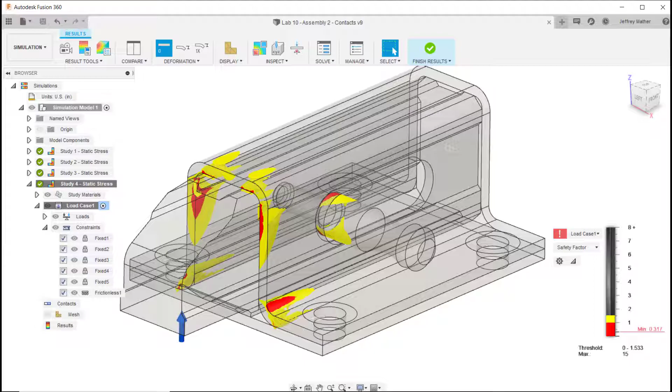After opening the step file in Inventor 2020, I grounded all of the components so that I don't accidentally move them. Then I want to measure a distance on one of the parts to make sure that the size makes sense. We see that it's 3.75 inches, which was our expected size, so we're okay on that.

We might go to Tools, Document Settings, and check the units. We see it's inch units, but when this was brought in as a step file, it sets our angle as radians. I'm going to change that to degrees.

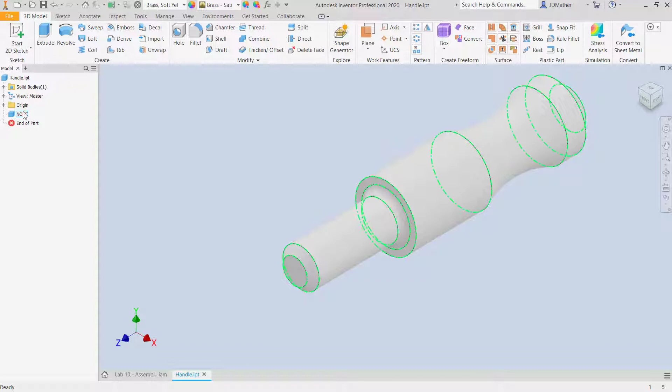I'm then going to open up each one of these parts individually. I'm going to open up the handle, and I'm not going to run any feature recognition on this, but I do want to run a quality check. I'll right click and select repair bodies, and select find any errors, select all, and I get a green check mark that everything is okay with that.

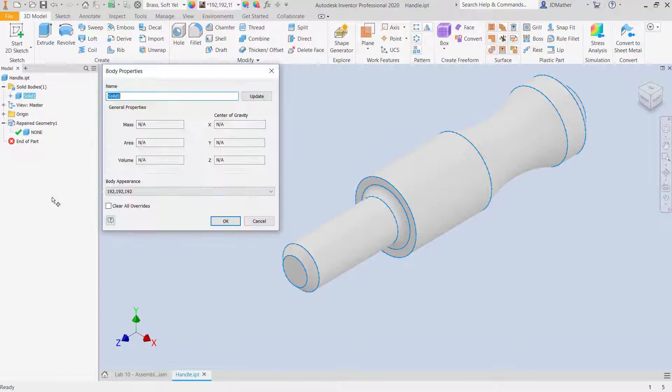Now I've already assigned the material brass to this. Notice the appearance is showing here as brass, but the part itself isn't showing as brass. Expand the solid bodies and right click on the solid body and go to properties and select clear all overrides, and it still didn't change, so let's right click again, and I'm going to set this as a brass appearance and select clear all overrides, and this time we have our color.

I'll save that and close it, and then I'm going to open up the base plate. I've already set the material to steel.

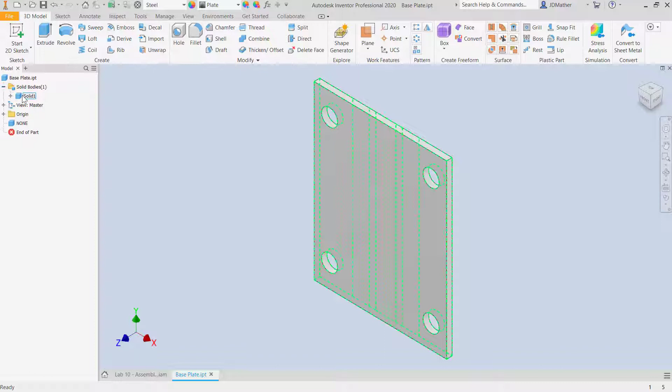I'm going to again right click and go to appearances or properties on that, and I'll select clear all overrides, and I'm going to select a steel polished color, and I'll right click and go to repair bodies, and I'll check it to find any errors. Green check mark, everything's okay.

I'll save that and go to the next part. I'll open up the housing, and let's go ahead - I've split this with the clamping faces where the fasteners will go, and I will run the repair bodies, find any errors, we get a green check mark, that's okay.

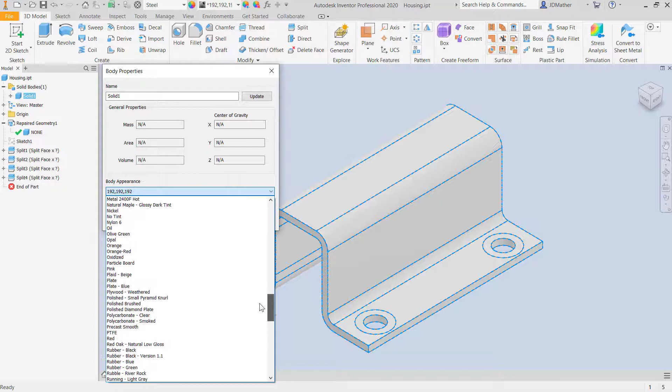I'll expand the solid bodies, right click, go to properties, clear overrides, and I'm going to set this as steel polished. Save that, close it, and I'll open up the latch bolt. I've set the material to malleable iron.

Let's check the part itself, select repair bodies, find any errors, everything checks out okay. I'll expand the solid bodies folder. I'll go to the properties, clear all overrides, and let's see if there's an iron cast appearance, and I'll save that, and I'll go back to the assembly.

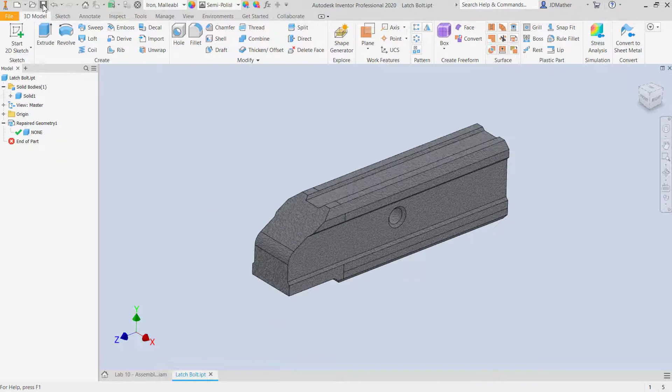Okay, so there is my assembly. I will save assembly, and then I'm going to go to environment stress analysis. I've already set this up and tested it out to run it a couple times.

In my first analysis, I didn't set the soft spring, so if I go to edit study properties, we see that I don't have it set to detect and eliminate rigid body modes.

I copied that study and changed a couple of other settings, and on this one I edit study properties, and I'm going to select detect and eliminate rigid body modes to add a soft spring. That will stabilize the model so this latch isn't moving.

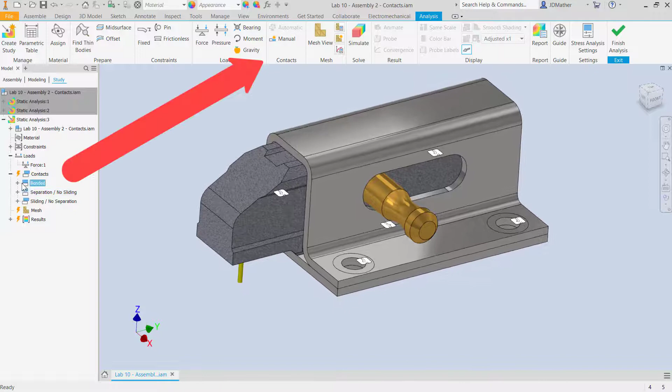I then on the loads I put the 1,000 pounds force pushing up on that face, and then for the contacts I changed the contact so that I have bonded on this side, bonded on this side, bonded between the handle and the latch, and then another bonded between the handle, the cylinder on the handle, and the hole in the latch. And then I have a separation no sliding on this side and a separation no sliding on this side, so as this pushes up this face can separate from the base plate.

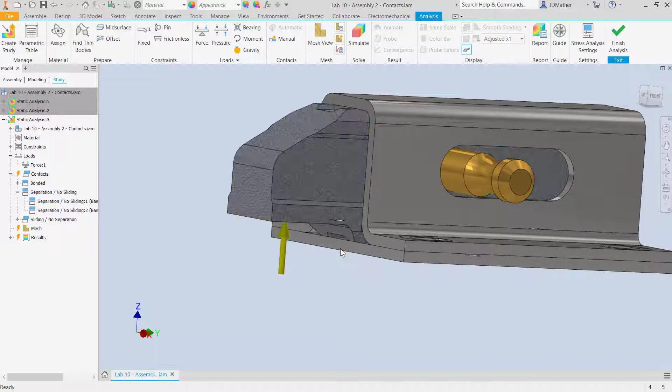And then I have sliding no separation on the side here, here, here, over on this side, and also up the top, the two faces up the top where that contacts it.

When we run the analysis, we get a message that the model has separated into two independent components. This is expected behavior as the latch and the handle are bonded into one component and the housing and base are bonded into the second component.

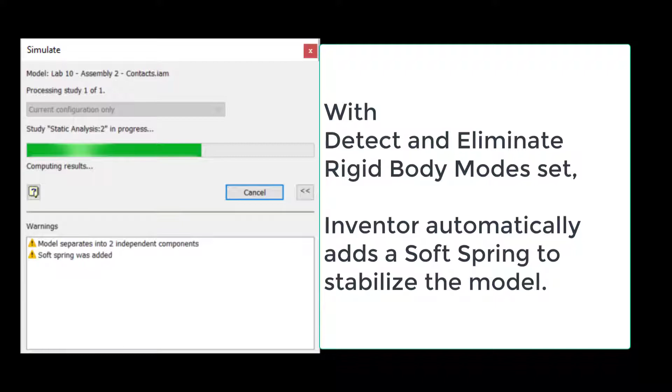With detect and eliminate rigid body modes set, Inventor automatically adds a soft spring to stabilize the model. If I go to the stress, I see that I have a high stress area right where this edge meets this edge, here and here. The rest of the area is not very high stress. For my displacement, I have a minimal amount of displacement, and for my safety factor now, I have a low safety factor where that high stress is.

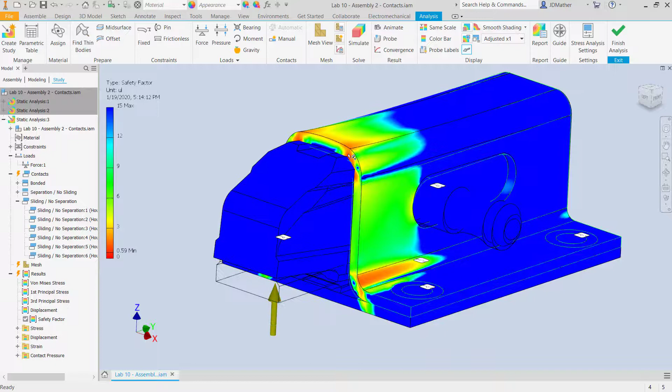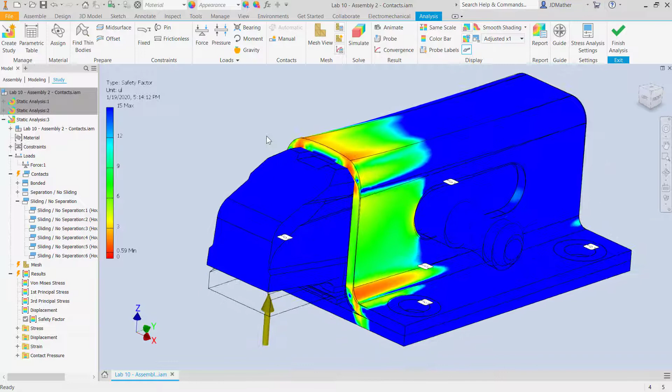So think that the stress is equal to force divided by area. The area where this edge is contacting that edge is close to zero, and so we end up with a singularity or a high stress area in that area that we can probably ignore, as we know that this edge is going to get rounded off as we use this assembly, but it really has no effect on the overall performance of the assembly.

I've brought in an imported STEP file. The first thing I'm going to do so that I don't accidentally move any of the components is I will fix them in location. I next want to check my units, so I'll go to the options and document properties. I'm going to set my standard to ANSI, and I want the units to be set to inches. And while I'm here, let's improve the image quality so that our circles look like circles.

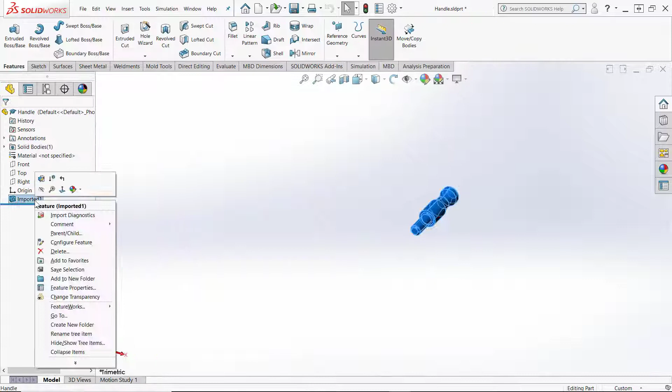I'll then measure one of the edges to make sure that it makes logical sense, and I see that that edge is 3.75 inches, so that's what I'm expecting. So always check your measurements and check your units to make sure that it makes sense. I'm then going to open up the handle, and I will right click and I'll run import diagnostics. I see that I have one issue. I'll attempt to heal that. I successfully healed it, and then we will set our material, and let's set this material as brass. I'll save the file and close that one.

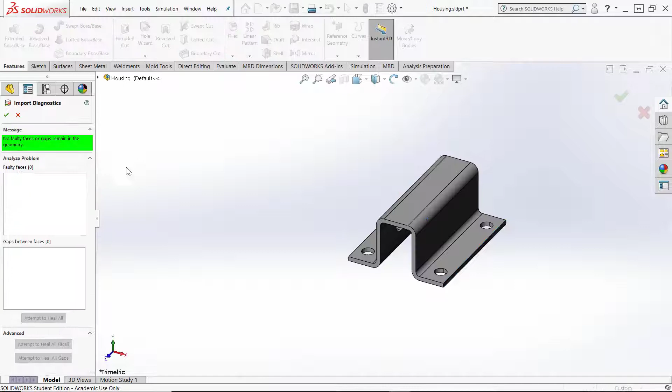I'll go to the next one, so I'll go to the housing. I'll open the housing. I'll run my import diagnostics, heal any errors, and let's set this material to 1060 alloy. I'll save the file and close it. I'll do the same thing for the base plate. Open that part, and we'll run our import diagnostics, and we will also set our material to 1060 alloy. And we'll do the latch. I'll run my import diagnostics, heal any errors, and let's set the material to malleable cast iron. Save that and close that.

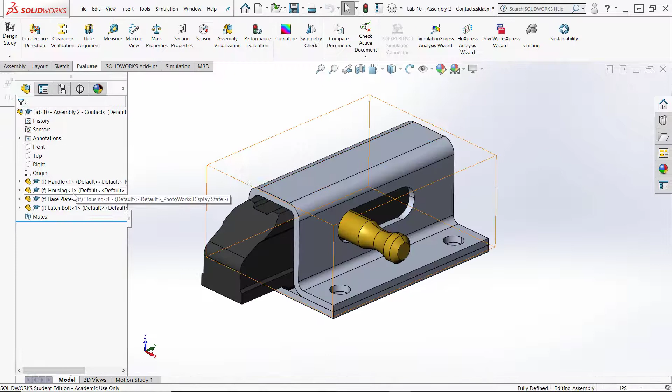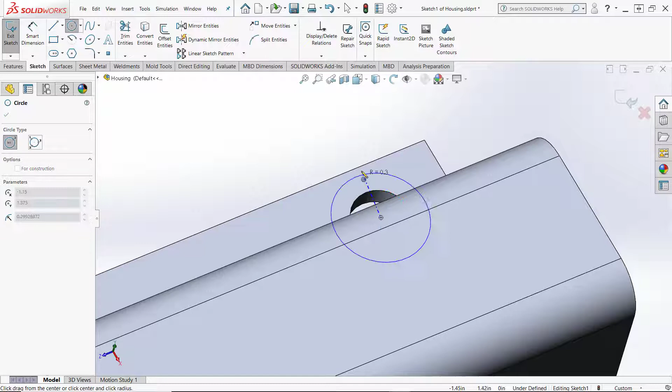Let's go back to the housing, and I'm going to open that again, and I want to split the clamping faces on the housing. So I will start a new sketch on that face, and then I'll draw a circle, and I'll scrub the edge for a minute. That finds the center. I'll draw a circle out from the center. I'll scrub this edge, draw a circle out from the center, grab that edge, draw a circle out from the center, and one more. I'll then dimension one of these circles as 0.625.

Make sure it's inches, and I see my units are showing in this one. Let's change that to inches, and then I will edit that sketch again, and I'll hold down the control key. I'll select these 4 circles and make those all equal. And then I'll go to the features tab, and I'll do split line. I want to split this face and this face. And so now I have those split. Save the file, go back to my assembly.

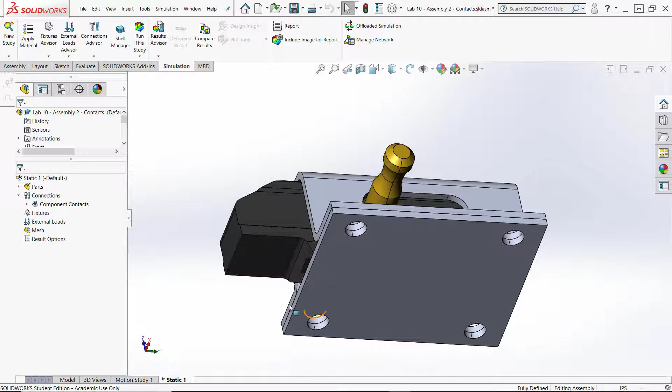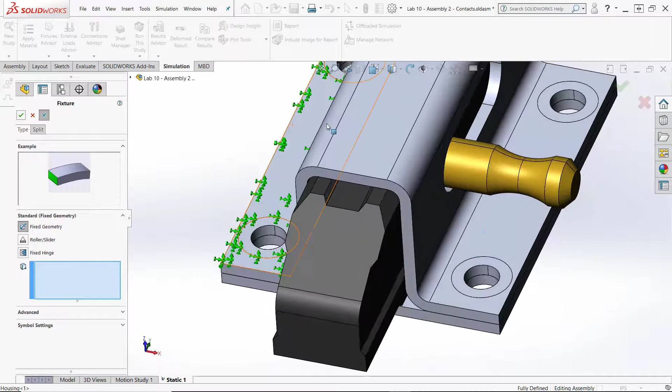Alright, so I want to run an analysis on this, so I will go to the simulation tab. I'll run a static analysis. I want to put a fixed constraint on this bottom face, so I'll go to my fixtures. I'll say fixed constraint on this bottom face, and let's just pin that. I'll say accept to that one, and then I want to put a fixed constraint on this face, and I'll accept that one. Now I'm going to do these as separate fixed faces. We could do it all as one, but later on we'll see a reason for doing those separately. Then I'll do this one, and I'll do the last one. Alright, so we have 5 fixed constraints on the bottom, and then the 4 faces.

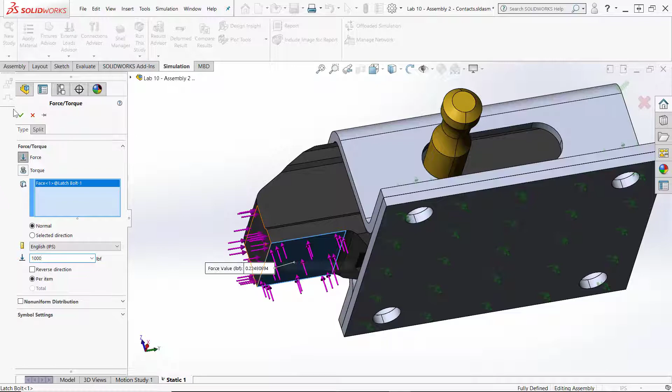I then want to apply a load on this bottom face, so I'll go to external loads. I'll do force on this face, make sure my units are inch, pound, seconds, and I'm going to do 1000 pounds force pushing up against this face. Right now I need to define the contact between the various components.

It might be easiest if I temporarily hide this housing, so I'm going to go to the housing, and I'll hide it, and then I have a cylindrical face down inside for this handle, down inside of the latch bolt. I'll go to my connections advisor, and I'll do contact set, and I want those to be bonded. So I'll select bonded, and first let's do this outside face. So I'll select this face, and then I'll do second selection, and I'll right click here and do select other, and I can get that face of the handle.

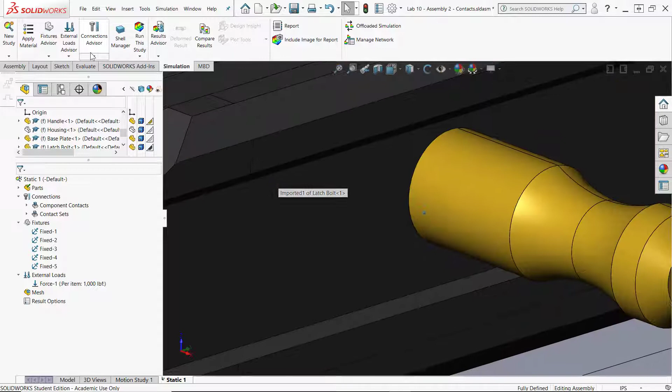So I've got that circular face of the handle, and then I'll do this again. So I'll do contact set again. Let's pin this, and I will right click in this area and I'll do select other, and I can get the circular face of the handle. And notice it's split into two faces, so I'm going to get the top face and I will right click again, select other. I got the bottom face.

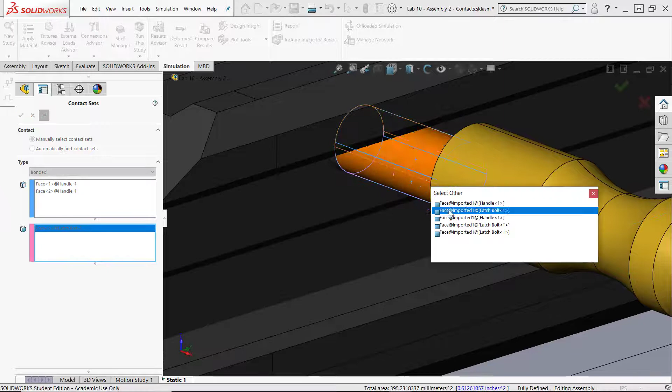Now we'll get the top face of the handle, and let's set this as bonded. And then I'll go to the second selection, and I need to get the hole inside of the latch bolt. So I'll right click here, select other, and I'm going to get the imported face of that latch bolt, and I'll right click up here and select other, and I need to get the top imported face of the latch bolt. So I have those two faces, accept that. So I'm doing these manually. We could do automatic and then change the types of contacts.

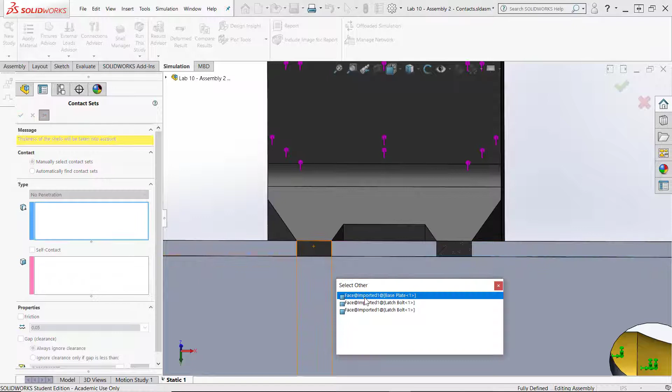Right, then let's go around to the bottom, and I'm going to go in this area right in here, and I'm going to set the no penetration, and I will right click in this area right here. I'll do select other, and I'll get the face of the base plate, and then I'll go to second selection and I'll right click again, select other, and I'll get the face of the latch bolt. I'll accept that one. Then I'll come over to this area, right click, select other. I'll get the face of the base plate, and for the second one I'll right click, do select other. This time I'll get the face of the latch bolt, and I'll accept that.

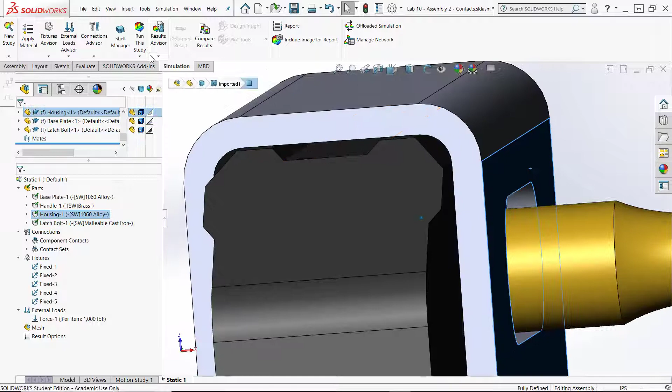Alright, let's go ahead and leave that command for a minute. We'll turn on the visibility of the housing, and for the housing, this face right here, that planar face contacts against the inside planar face of the housing. So we'll do our contacts again, manually, and I'm going to set that as no penetration. So I'll select this face and this face, and I did that both all in the same selection. So let's just clear the selection and do it again.

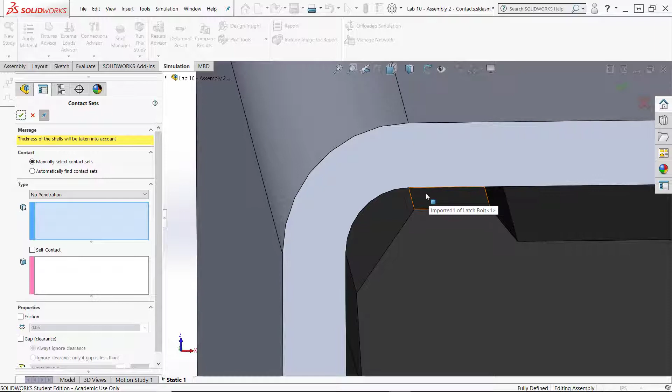I have no penetration, this face to second selection, this face, and then down here this face, and actually let's get it back there. So I'm going to clear that selection, and I'm going to get it back here, and then to second selection, this face, and I'll get it on this side, this face, second selection to this face, and then this face again to second selection, this face. Then I'm going to do this face. Now notice it's treating this as a split face here. Let's get the face underneath here first, and actually it's treating that as a split face too.

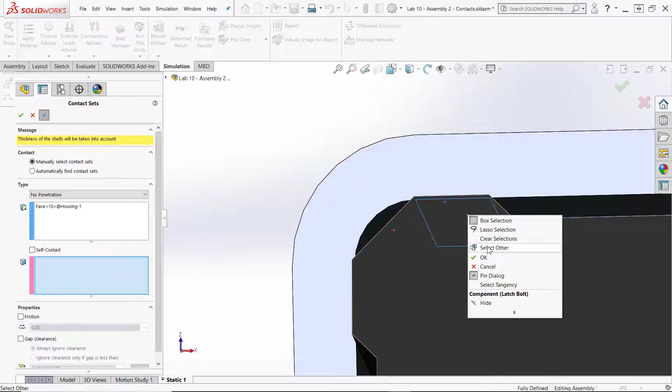So I'm going to move my mouse about in this location. I'll do my select other, and I want to get the face that's going all the way back along the housing, and then I'll right click and I'll do select other again for second selection. Now I'll do select other, and I'm going to get the top of the latch bolt, and I'll do the same thing on the other side. So I'll select other, and I'll get the face of the housing, second selection, right click, select other, face of the latch bolt.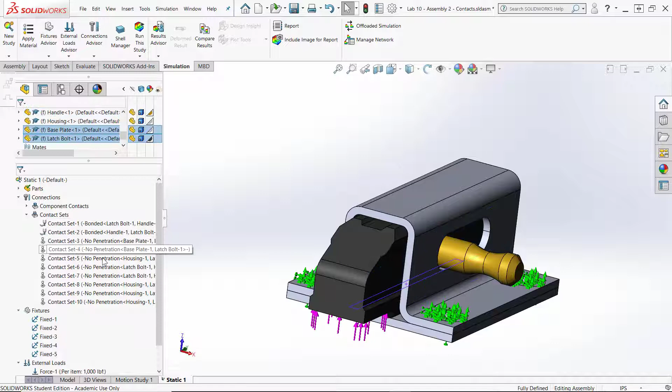Alright, so if we check our contact sets, we have the no penetration contact going around the latch bolt at the top on this side, top over here on the side, and the contact on this side, on the bottom, the bonded, and the bonded. Then I'm going to get the contacts on the sides.

So I'll go to my contact set, and I'm going to put this as no penetration, and I will right click in this area. I'll do select other, and I want that face of the housing. I'll go to second selection, I'll right click, select other, and I want the face of the latch bolt. I'll accept that, and let's do the next one. Let's pin this, and I'll come down to this area and do select other, and I want the face of the housing, and second selection I'll do select other, and I want the face of the latch bolt, accept that one.

Then let's go ahead and get these up at the top. So I will select other in this area, and I want the top of the housing, second selection, select other, top of the latch bolt. Select other in this area, the top of the housing. And then for second selection, select other, the top of the latch bolt.

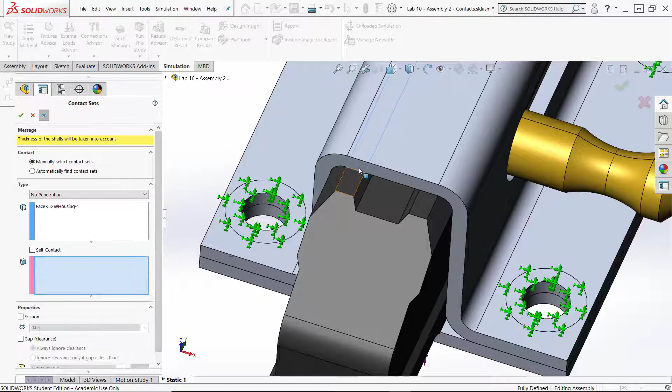We got two more to go, so I'll come over to this area, select other, the face on the housing, second selection, face on the latch bolt, and the last one, select other, housing, second selection, select other, the latch bolt. Alright, so let's check those.

So if I go to my contact sets, I have the circular face on the handle is bonded. The cylindrical face on the handle is bonded. The bottom of the latch bolt to the top of the plate, the base plate, is no penetration. On the other side, between the base plate and the latch bolt, is no penetration.

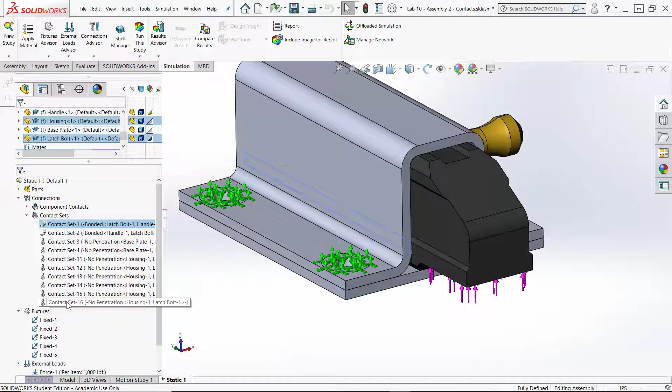At the side, at the top, at the bottom of the side, up at the top, on one side of the top, on the other side of the top, and then on this side at the top and this side at the bottom. So we've defined our contact sets. Okay, now on this assembly though, this latch bolt isn't fully constrained in that it could move out of here. Let's see if it gives us an error.

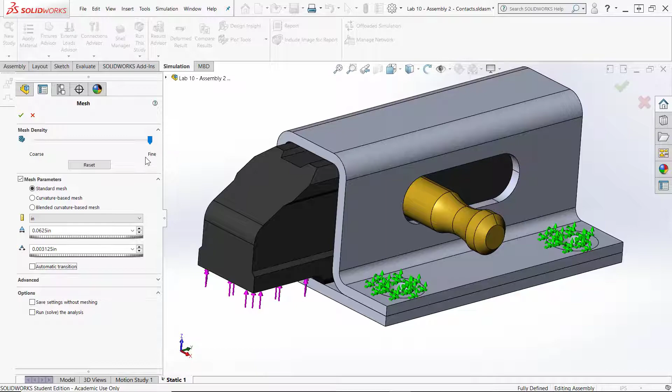We'll first mesh the part and then we'll attempt to run it and see if it gives us an error that it is unstable. I'll go to create mesh. I'm going to go to advanced, mesh parameters, and for the global size, let's set that as 0.0625. I hit the tab key and I see that it sets this all the way up to fine. I'll go ahead and create my mesh.

So I wanted to have at least 2 divisions across the thinnest area, and we can hide that mesh now, and I'll then run the simulation. So I'll run this study. Running the analysis with these contacts, I eventually got an excessive displacement warning.

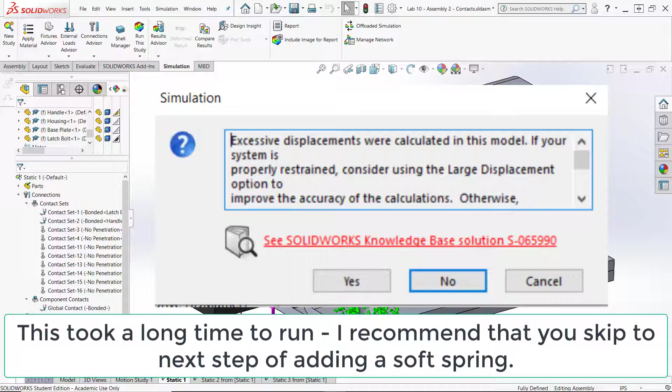And so I right-clicked on this analysis and did copy study, and also went to the properties and selected use soft spring to stabilize the model. Since this latch is technically not fully constrained, where it could slide back and forth slightly, we need to put a soft spring in here to stabilize the model since we're doing static analysis.

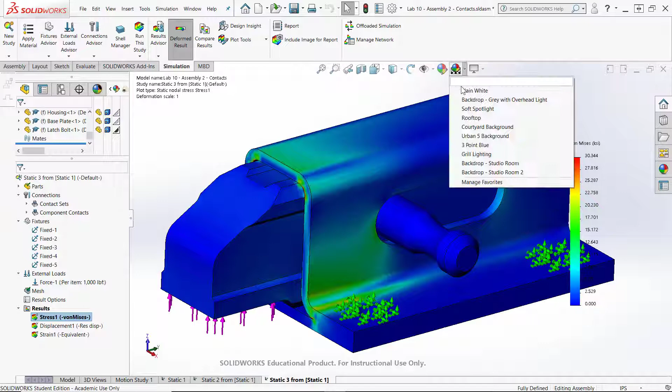All right, after I did that, I was then able to run the analysis, and let's change these units to KSI. So I'll double click on the color graph and I'm going to set it on floating, and I'll go to KSI, and I'm also going to change the background to white to make this a little easier to see, particularly if you were going to put this into a Word document or lab report. And so we see our stress.

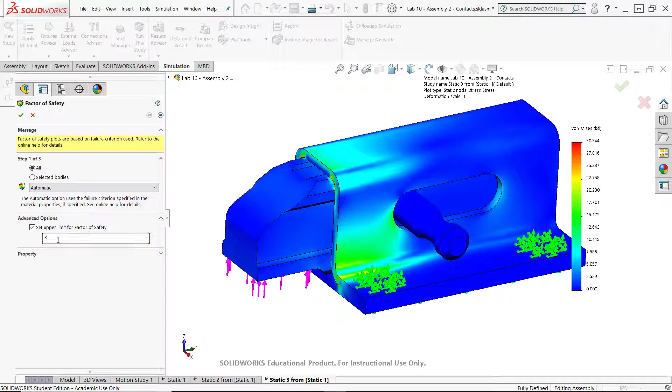We will go to the displacement, and I see that I have 4,000th of an inch displacement, or about the thickness of a sheet of paper. I want to display the factor of safety, so I'll right click and select define factor of safety plot, and I'm going to set the upper limit as 3. And I see that my minimum factor of safety is well below 1.

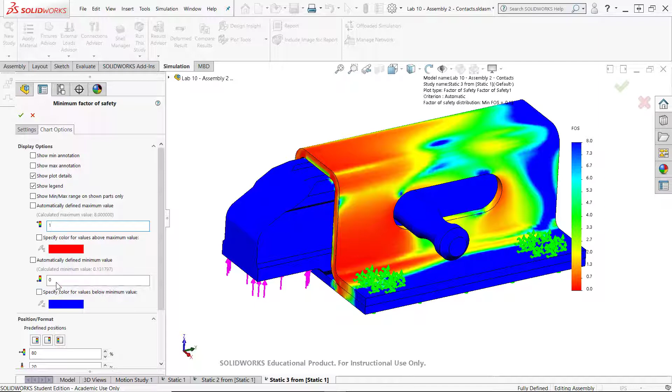Let's change this color bar, and I want to set it to floating, and I'll do 1 decimal place. And then I want to set it to show me the safety factor from 0 to 1, so maximum set at 1, minimum set at 0. I know that the minimum calculated safety factor was 0.13, so I'll say OK to that. And so now everything that is blue is above 1, and if it's not blue, it's below 1.

But let's look at where the minimum factor of safety is. It's actually just in this edge right along here, and in the edge right along there. And so we know if we push up on this that over time it's going to round off this edge right along here, and so that doesn't really affect the overall performance of the assembly.

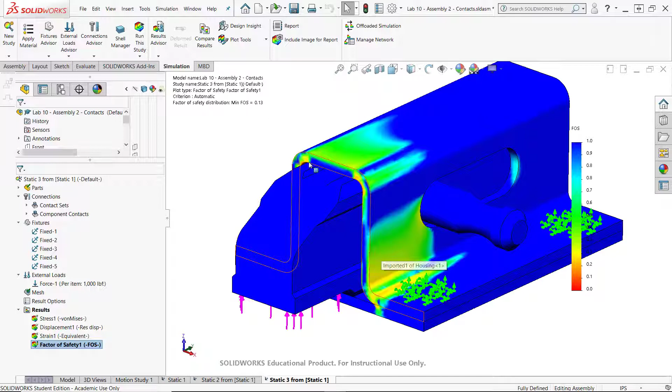So we have to watch out for situations like that when we can see that most of the assembly is just fine as far as our safety factor is concerned, but it's only along this edge where we have a high stress or a low safety factor. For this lab, the first thing I want to do is import a neutral format step file.

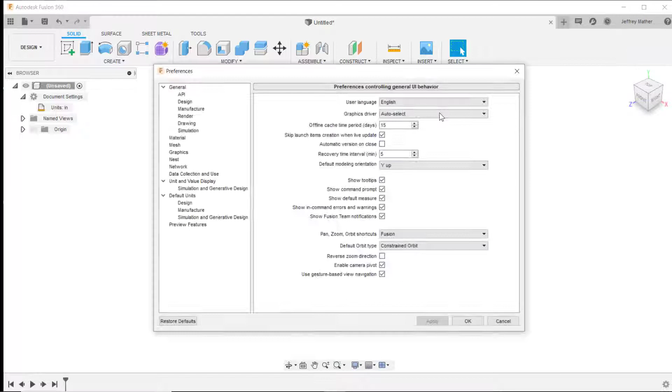But before I do that, let's check our document units. I know that the file will be in inch units, so I'm going to change the units to inches, and I'm also going to change my preferences to give me my analysis results in inch units.

So then I will do open, and I will go to locate the file, and this one I've named lab 10, and I see a latch type block, and the first thing I want to do is check some of the sizes of the geometry to make sure that it matches what I expect to be the correct size.

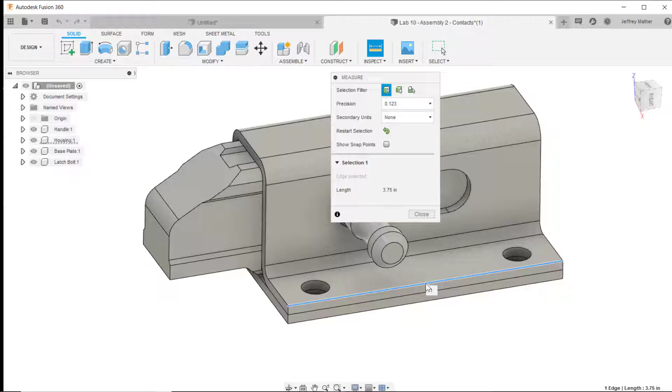So I'll go to inspection, and I'm going to measure the length of this line, and I see that that length is 3.75 inches, which makes logical sense. If it was 0.375, that wouldn't make logical sense. Or if it was 3.75 millimeters, that wouldn't make sense, but 3.75 makes logical sense for the size of this part. The next thing I want to do is apply various materials to the components.

And actually, before I do that, I don't want to accidentally move anything from the positions where they are right now, because if we want to compare results, we need to be in a standard position. I'm going to lock the position of these parts. So I'll ground all the parts so that I can't accidentally move their relative positions to each other. Now, this grounding doesn't carry over into the FEA environment.

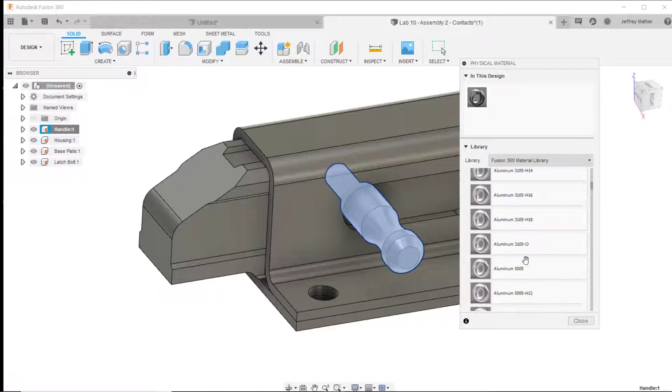For the handle, I'm going to go to the physical material of this part, and I will go to metals, and I'm going to go down and find brass. I'll make this part brass. Now, if I go to the properties, it's showing me that it is brass, but I lost the color on that. So I will right click and go to the appearance, and I'll also drag the appearance brass onto this part. Now, I had to drill down into the brass folder, appearances, drag that into my model, and place that.

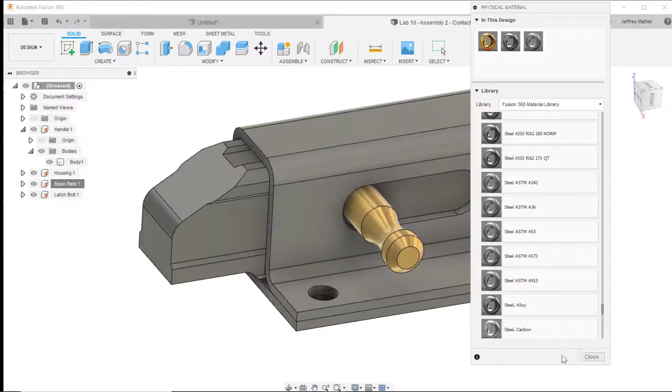Next, I want to change the material for both of these plates. So I'll select the housing, and I'll hold down the control key. I'll select the base plate, and I'll go to physical material for those two parts. And I'm going to go to steels, ASTM A36, and let's make sure that I apply that to these two components. And again, the colors from the imported file overrode the steel colors.

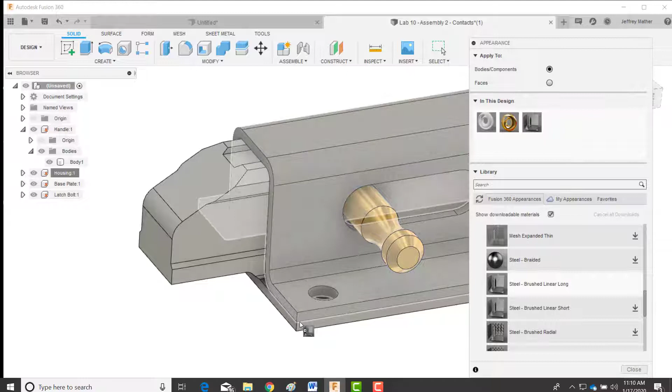So I'll go to the appearance, and I'm going to select, let's say, a steel brushed linear long. I'll download that material, put it into my assembly. I'm going to apply it to this body, and I'll apply it to this body. See the appearance of that material.

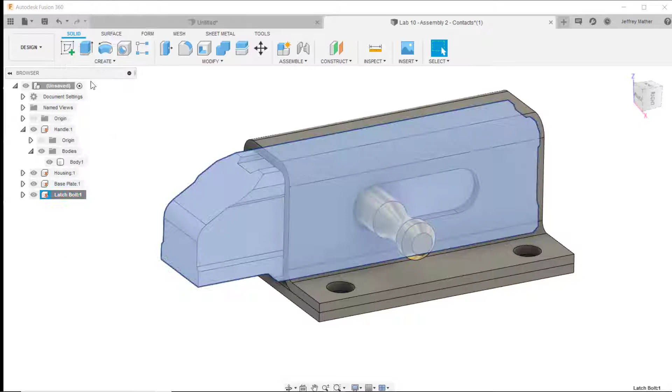And then I'm going to change the material of the latch itself, and so I'm going to make this iron. Let's make this a malleable iron. So I'll drag that over onto this part, and again, I lost my appearance. I'll right click on the latch bolt, go to appearances, and I'm going to go to the iron folder, and let's do a cast iron appearance on this body. Okay, so now I've applied my materials, and I have applied appearances. Now the appearances aren't really necessary.

I'll then go to the simulation environment. We're going to do a static analysis. I'm going to put a fixed constraint on the bottom of this, and then I will put a bolt through here, and the clamping face of that bolt will press against this plate in a circle. So I want to split this face in each one of these bolt locations.

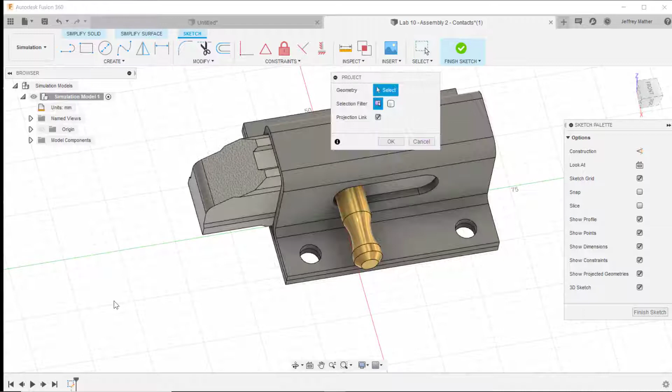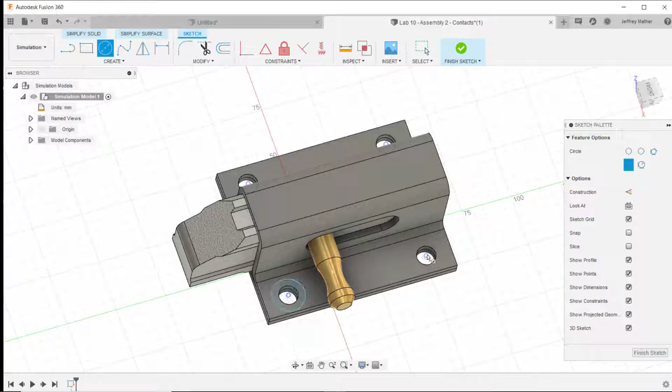So I'm going to go to the simplify tools, and I will then create a sketch on this face, and I'm going to P for project, and I'm going to select these 4 circles, and then I prefer to change those to construction circles. So I'm going to select those circles, change those to construction, and then I'm going to draw 4 more circles. So I'll put a circle here, and a circle here, a circle here, and a circle here.

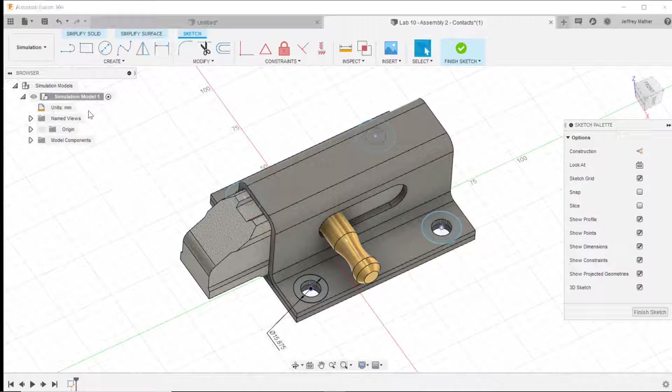I'm going to dimension one of these circles, and let's make that, let's say, 0.75 inches. And that's a little bit too big, so let's do 0.625. Now I notice that the units are being converted to millimeter units. So I want to come up here and change those units to inch units so that it matches the rest of my analysis. So I'll do equal this one to this one, this one to this one, and this one to this one. Okay, now they're all the same size.

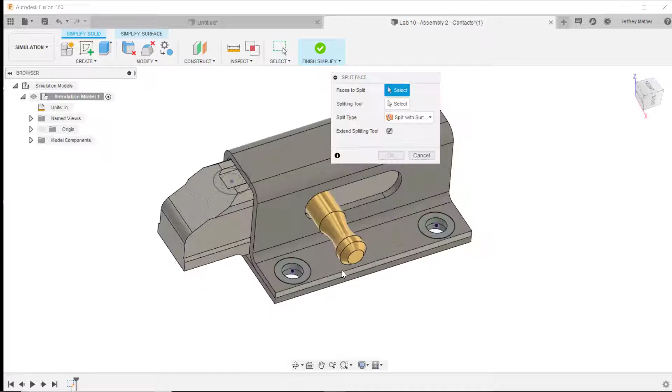I'll finish sketch, and then I'm going to do a split, and I want to split the faces, and I'll select this face to split, and for the splitting tool I'll select this circle, and it will only let me do these one at a time, so I'll have to do it 4 times. So I'll say okay to that.

I need to make that sketch visible again, so I'll go to the sketches, make it visible again, and then I can do the split again, and I'll split this face with this circle, and then the same thing on the other side. So I'll do split this face with this circle, and split one more time this face with this circle.

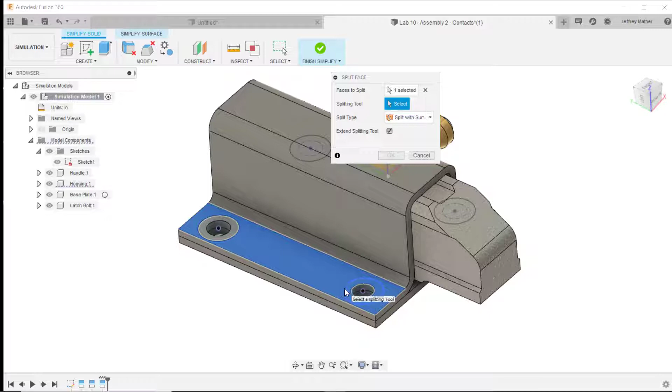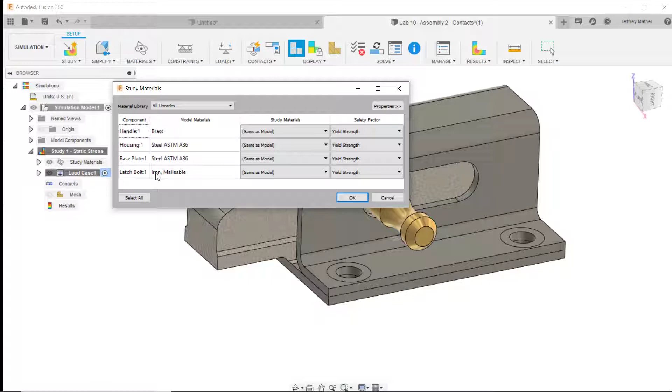Once I split my faces, I will then turn off the visibility of the sketch. I'll finish simplify. I want to check my materials, so I'll go to materials, and I see that for the handle I have brass, for the housing ASTM A36, for the base plate ASTM A36, and for the latch bolt malleable iron. Now if I want the properties of those, each one of these, I can select here for properties and record the properties of my materials in my lab report.

I'll then add fixed constraints to these faces that I split, and I normally do these one at a time. I could select all 4 of them, but I prefer to do them one at a time, and we'll see why in a later lab. So as I'm doing this, I want a separate constraint for each one of these fixed constraints. So I end up with 5 fixed constraints, the one on the bottom and the 4 where the fasteners will clamp against this housing.

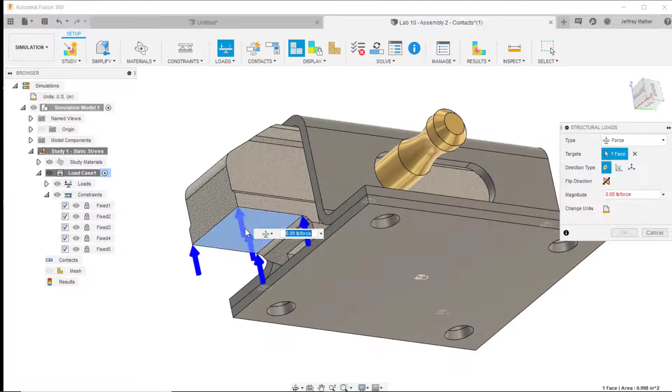I'm then going to add a load of 1,000 pounds force pushing up against this face, this location. Let's change that to 1,000. Make sure your units are pound force. Now if you wanted to convert this to metric units, simply substitute, or you could just type in the metric units. I then need to define the contact faces between the various components.

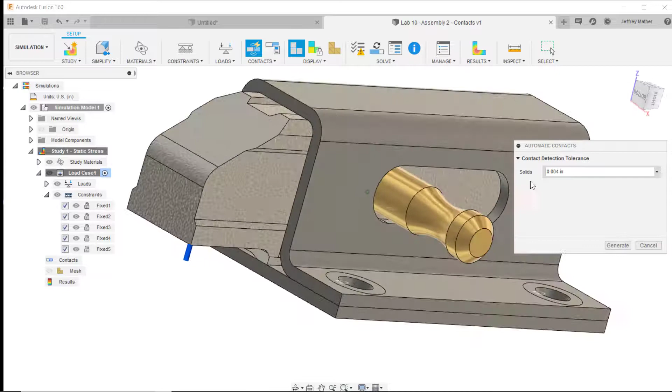So up here under contacts, I can do automatic contacts, manual contacts, or later we'll edit our contacts. For now, let's tell it to do automatic contacts. And so if it sees a distance less than this setting, 4/1000 of an inch, it will establish a contact. So you have to be careful you don't put this number to be too big, because you don't want it to establish, say, a contact between this face and this face if they're not in fact in contact.

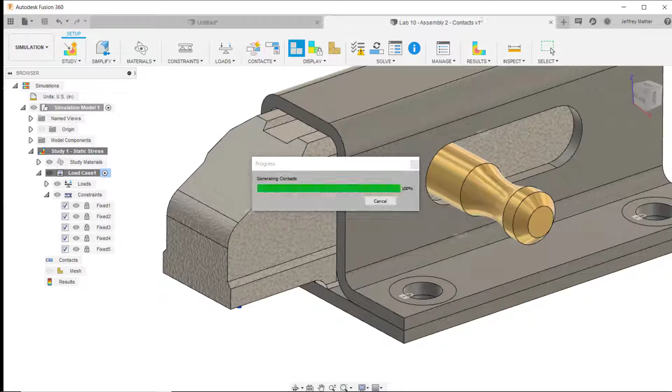And so I'll go ahead, and our faces are actually already touching each other, so there's no clearance between these parts, which actually in the real world there should be some clearance between these parts where this latch wouldn't be able to slide back and forth. Generate the contacts. If I edit the contacts for this first contact, bonded 1, as you push up on this, this could actually separate from this face.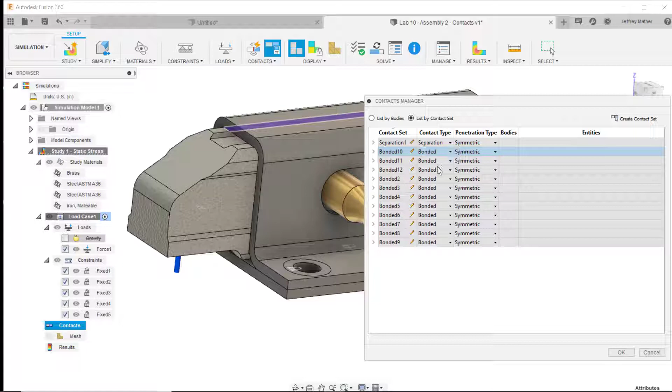So I'm going to select that to separation, and then I'll go to the next one, and this one could slide along this face, but it's going to push up against that. I'm going to set that to sliding, and then for the next one, this face doesn't contact, so I need to really remove that one. Actually, I was incorrect. So we set a minimum distance of 4/1000 of an inch, but that's less than 4/1000 of an inch. That contact is actually between the face of this and this face, and so that should be bonded. So we'll leave that as bonded.

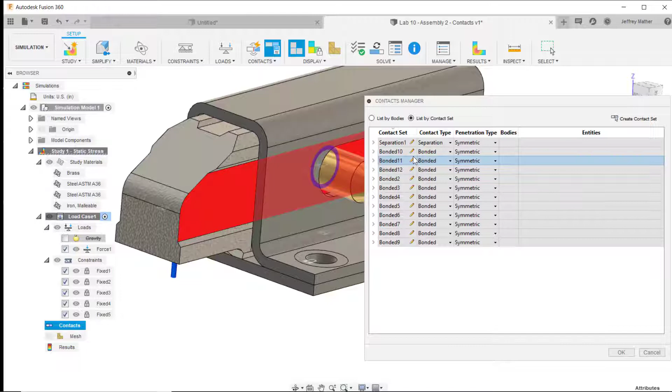And then between this fastener cylinder and the hole, so that should be bonded. This one will be separation. This one will be bonded. This one will be bonded. This one will be sliding. This one will be sliding. This one will be sliding, and that one will be sliding. So as this latch pushes up, it can slide along that face, and this one will be sliding. Part can slide towards the front.

So let's go back through all of these. This one should be sliding. This one is bonded to the handle, then the other bonded to the handle. Separation, bonded, bonded, sliding, sliding, sliding. And that one, I need to get that one to sliding, and this one is sliding, and this one is separation. I think I have all of my constraints set the way I want them.

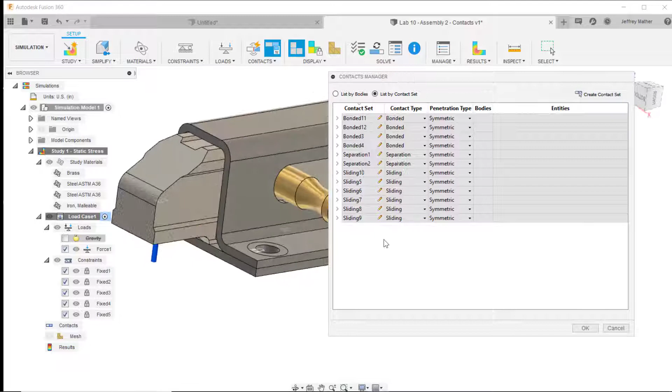Now if you click on the edit pencil and select advanced, you'll see that there are a lot more options on how you can define your contacts depending on the type of contact. I want to measure this shortest area across here, and so I'll go to the inspection tab and measure this length, and I see that that is 0.125. I want at least 2 divisions across the thinnest area.

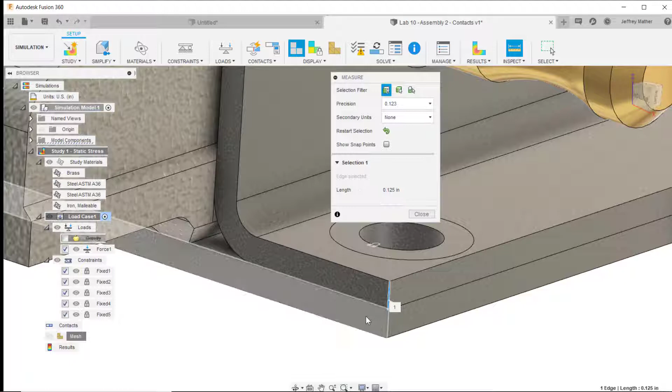Some users will recommend 3 divisions. I'm going to edit the mesh and go to advanced settings, and set the absolute size of the mesh as 0.0625, and then generate my mesh.

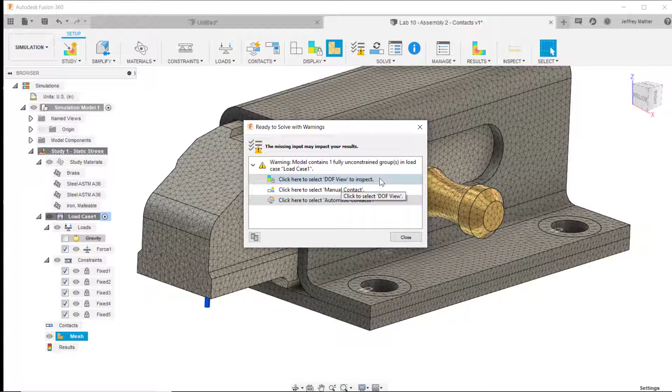I will then run my analysis. Now I notice that my pre-check failed, so I'll click, and it tells me there is a degree of freedom issue. So this part is not fully constrained, which we know means it should slide back and forth.

So we need to constrain this part. In order to do that, I want to add a weak spring to this part. So I'm going to go to settings and remove rigid body modes, which should add a weak spring to hold this in place.

But I see that doesn't fix it in Fusion 360, so that's a problem. We know as we push up on this area, it's going to push against this face, and so this face and this face, and the faces on the other side, are going to slide up the side of this part, and then this end will push down against the base plate.

So what I'm going to do is put a fixed constraint right on this edge and on this edge of this part. If we're pushing on this right now, the way it's set, it could still slide. So we need to stabilize this model. I was hoping that eliminating rigid body modes or adding a weak spring would stabilize it.

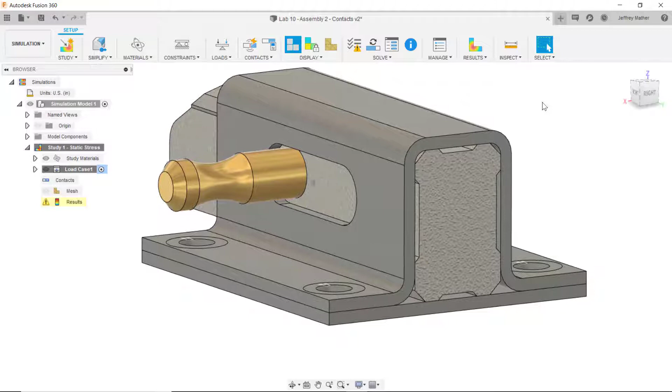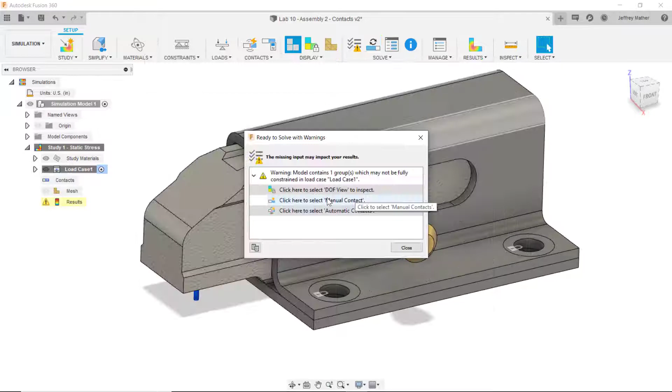That didn't work, so let's try constraints. I'm going to select this edge and this edge to constrain those two edges, say OK, and it's still showing this area is fully fixed. Let's see what happens when we run the simulation now. It still gives us a warning, so placing the fixed constraints here on these edges didn't work.

So let's try another tack. I'm going to hide the base plate, go to simplify again, and start a new sketch on the bottom face of the latch. I'll project this point and this point, draw a rectangle about like this, drag this point down to there, and put a dimension from here over to here.

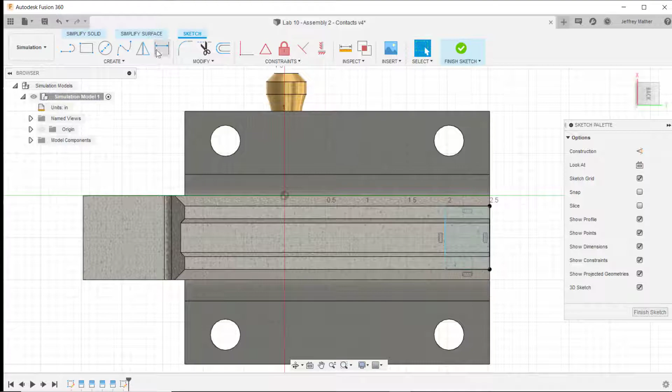Now we could make this distance as small as we like. We could assume that as we push up on this thing, it's going to lift up in this area, but somewhere back in here it's not going to lift up. So let's put in, say, 0.15 as the area that stays in contact.

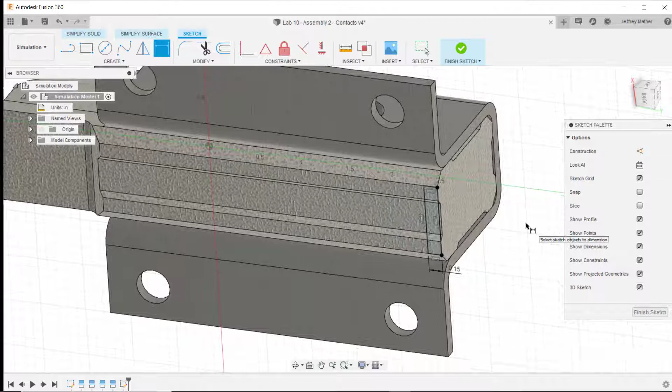Then I'm going to split using that rectangle. I'll split face, select this face as what I want to split, select this rectangle, say OK, and finish simplify.

Then I'm going to edit the constraints we put on the edge. I'll control-unselect those edges and select these faces instead. I'll turn the visibility of the base plate back on, go to my pre-check, and this time it tells us everything is okay. We are ready to run the simulation.

So I'll run the simulation, doing this locally. I was able to get the Fusion 360 result to run, and again we have a low safety factor.

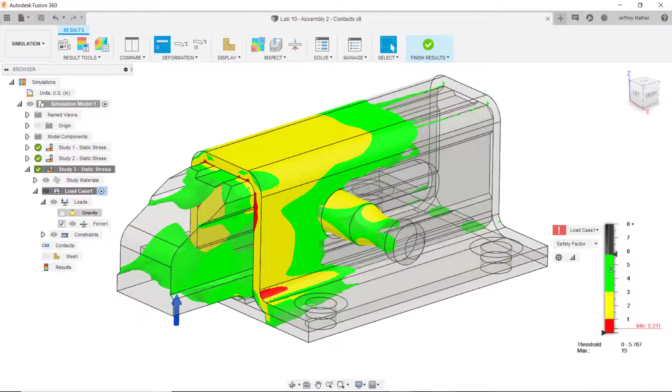If I show this from, let's say, 1 to 0, we see the high stress areas are right along this edge, and again that doesn't really affect the performance of the assembly, since we'd expect over time this edge would get rounded off.

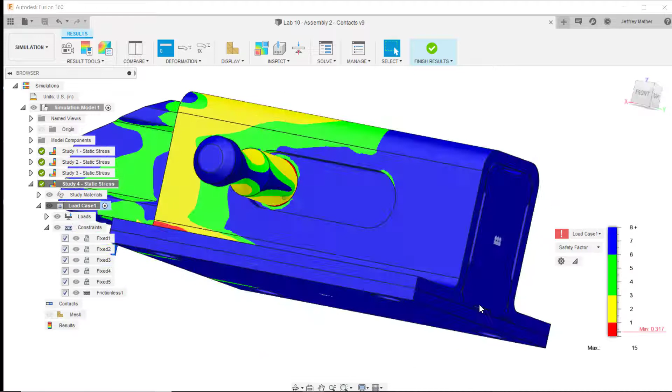So I cloned the previous study and ran one more test. This time on the constraints, I deleted the constraints I had on the split face on the bottom back here and replaced that with a frictionless constraint on this face, which seemed to make it easier to solve, although I solved it online and it took quite a while. But I think that might be the best way to set this up to get it to solve.

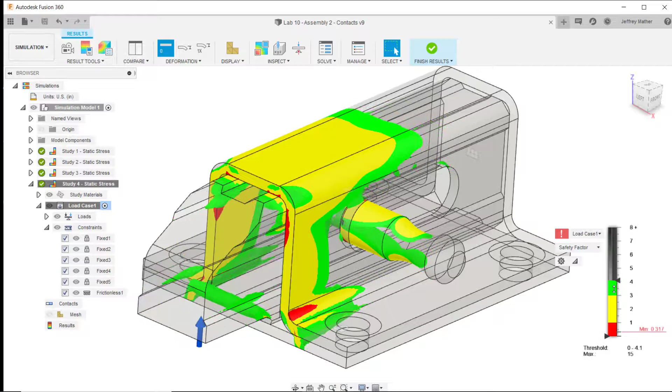So if I drag my upper limit down here, I see the highest stress areas are in areas we're probably not real concerned with, limited to a very small part of the mechanism, so we can probably ignore those minor high stress areas.